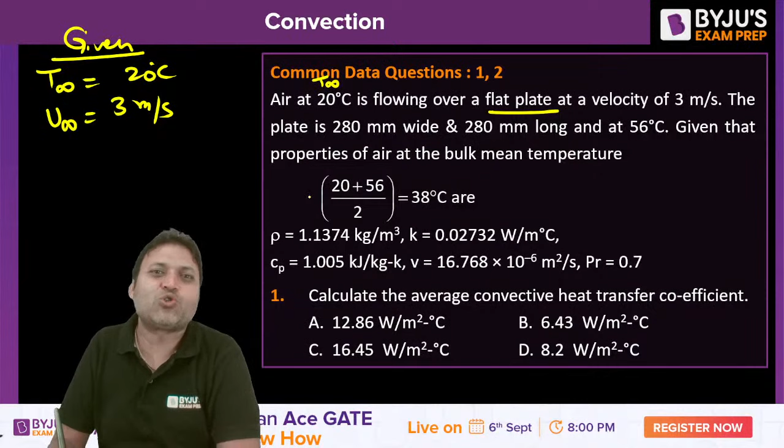Air at 20 degrees Celsius, which we call the free stream temperature of air, is flowing over a flat plate at a velocity, which we call U infinity, equal to 3 meters per second. The plate is 280 mm wide, and length L is equal to 280 mm or 0.28 m. The surface temperature is 56 degrees Celsius. The properties of air are given at the bulk mean temperature, which we can also call the film temperature, and are to be used at that film temperature.

These are the properties of air: density, thermal conductivity, specific heat, and kinematic viscosity, as well as Prandtl number, are given. The first part of the question asks to calculate the average convective heat transfer coefficient. You need to find out H bar. Can you solve it?

First step is to check whether the flow over the flat plate is laminar or turbulent, because there is a different formula for H if the flow is laminar, and a different formula for calculation of H if the flow is turbulent. So first, let us find out the Reynolds number based on the length of the plate, that is rho into U infinity into L by mu, or we can say U infinity L by kinematic viscosity.

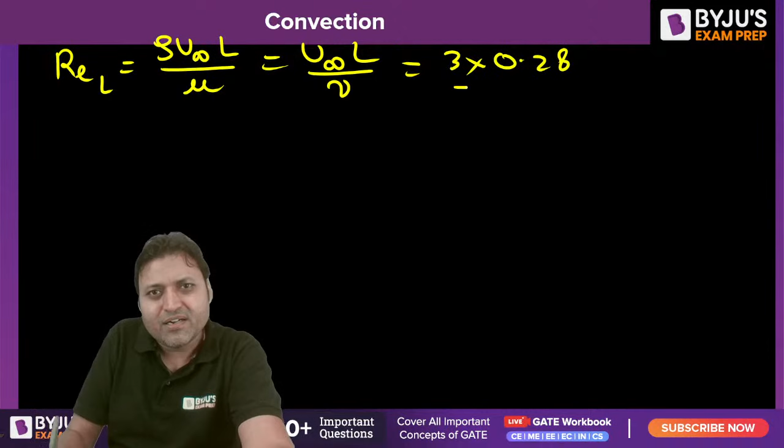Can you find out the Reynolds number? What is U infinity? That is 3 meters per second. Length is 0.28 and kinematic viscosity is given as 16.768 into 10 to the power minus 6. What is the value of Reynolds number? Can you let me know?

The value of Reynolds number should come out to be... are you getting 5 into 10 to the power 4 or not? Reynolds number based on the plate length, using kinematic viscosity, because meter square per second is the unit, it is the kinematic viscosity. 5 into 10 to the power 4.

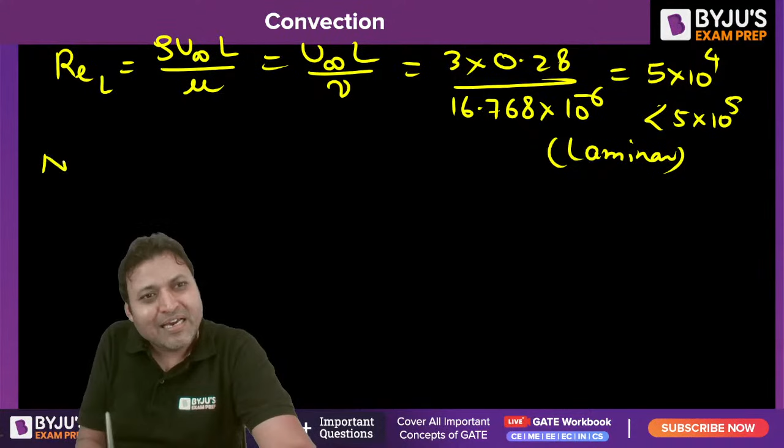So it is almost 5 into 10 to the power 4, which is less than 5 into 10 to the power 5. So the flow is laminar, and if the flow is laminar, average Nusselt number is given by H bar.

H bar into L by Kf is equal to 0.664 into Reynolds number to the power 1 by 2 into Prandtl number to the power 1 by 3. From here we can find out H bar. What is that? 0.664 into 5 into 10 to the power 4 to the power 1 by 2 into Prandtl number, value 0.7, to the power 1 by 3, into thermal conductivity of the fluid, that is 0.02732 upon L, that is 0.28.

Can you find out H bar? What is the value of H bar? Is this clear?

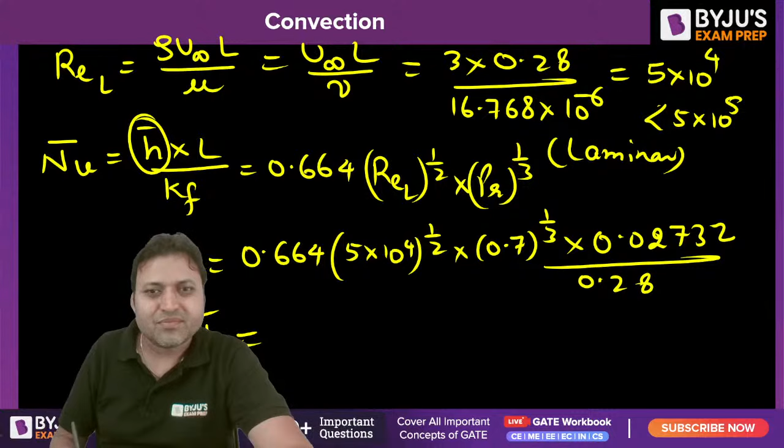If the flow would have been turbulent, can you find out the value of H bar? For turbulent flow, what would have been the formula? When Reynolds number would have been greater than 5 into 10 to the power 5, then Nusselt number would have been H into L by Kf equals 0.03 into Reynolds number to the power 4 by 5 into Prandtl number to the power 1 by 3. That would have been the formula.

If you solve this, then your answer should match with an option. Can you solve it? Can you get the value? Are you guys getting option A or not?

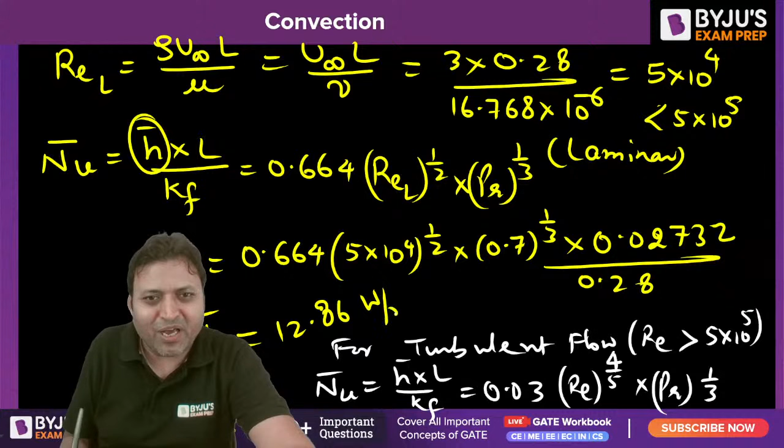12.86. Please give me thumbs up those who are getting 12.86. Option A, very good, Kranti. Well done. Have you understood the question? Have you understood the solution? 12.86 Watt per meter square Kelvin is the correct answer, option A.

That is the first part. The second part is: what is the rate of heat transfer by convection? How to calculate the heat transfer rate by convection using Newton's law, H bar into surface area into delta T. What is H bar? We have already calculated, 12.86. What is the area? That is L into B into delta T. Delta T would have been, what is delta T?

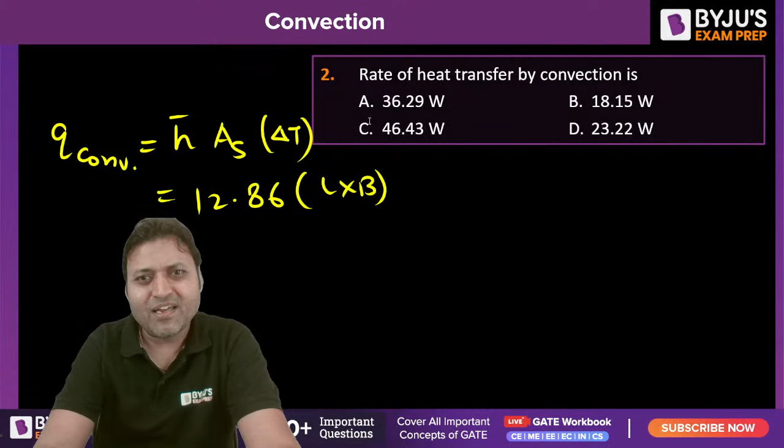Delta T would have been 56 minus 20, Ts minus T infinity. Put the value: 12.86 into 0.28 into 0.28 into Ts, that is 56 minus 20. What is the value of heat transfer?

Yes, Narayanan, are you asking something? Bulk mean temperature is the film temperature where the properties are supposed to be used. Are you getting option A, 36.29?

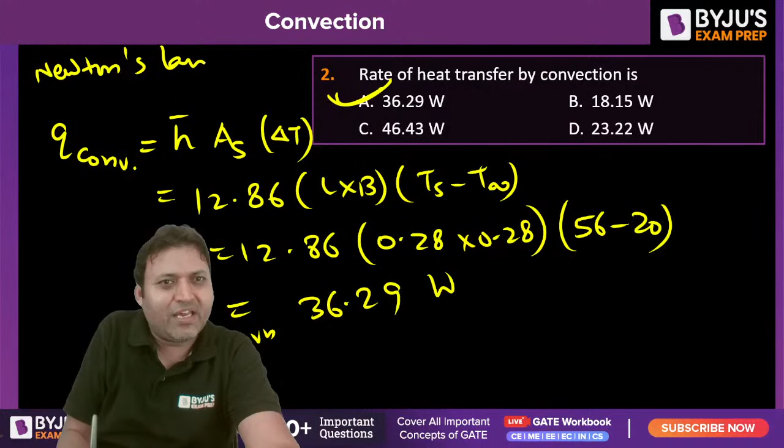Newton's law of cooling or convection, Newton's law of cooling is... Quickly solve the question, quickly get the answer. Your speed and accuracy, these are the two things which are important. Alright, can we proceed for the next one?

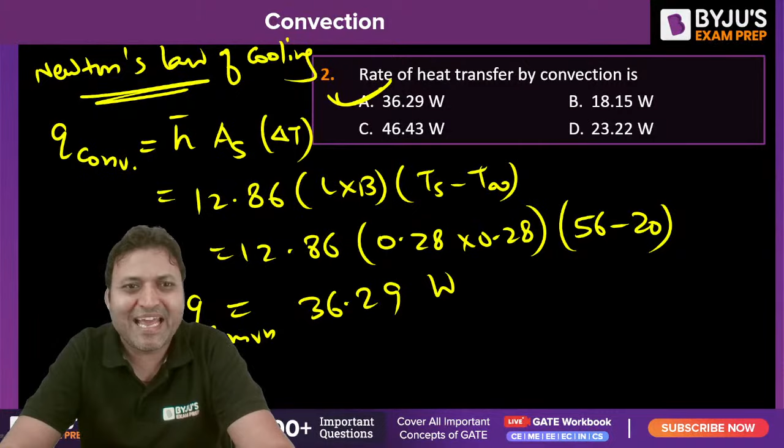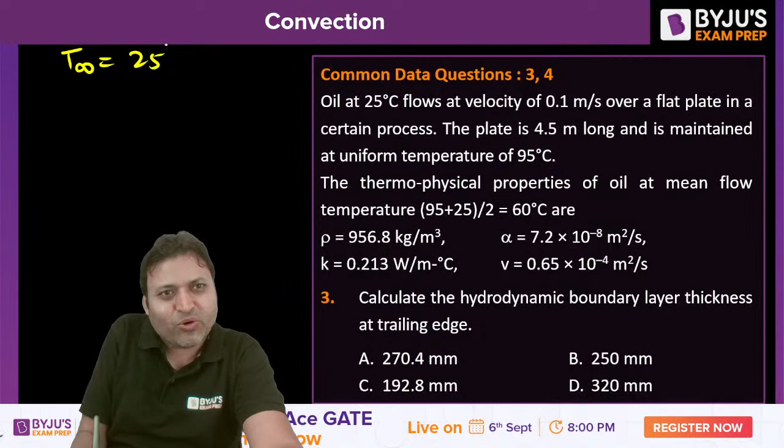Common data question for 3 and 4. Oil at 25 degrees Celsius, it means the free stream temperature of oil is 25 degrees Celsius. That is given. First of all, always write the given parameters. Flows at a velocity, that is U infinity free stream velocity, 0.1 meter per second, over a flat plate in a certain process. The plate is 4.5 meter long and is maintained at a uniform temperature, plate temperature TS, 95 degrees Celsius. The thermophysical properties of oil at mean flow temperature, that is 60 degrees Celsius, is called film temperature.

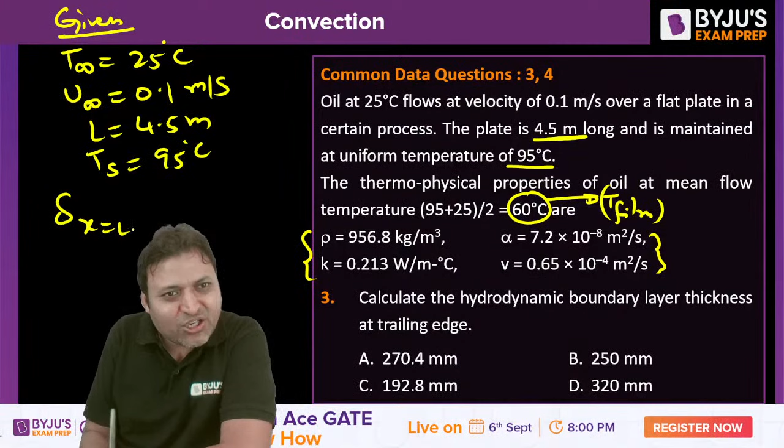You can call mean temperature as 95 plus 25 by 2, equals 60 degrees Celsius. These are the properties which are supposed to be used at 60 degrees Celsius. Calculate the hydrodynamic boundary layer thickness at the trailing edge, delta at x equals L, is the first part. We need to find out delta at x equals L. Can you solve it? First, again we need to check whether the flow is laminar or turbulent. How to check? Reynolds number at x equals L, that is U infinity L by kinematic viscosity. Put the values.

U infinity is 0.1, L is 4.5, and kinematic viscosity is 0.65 into 10 to the power minus 4. If you solve for Reynolds number, what is the answer? The Reynolds number will come out to be, please check and let me know. Are you getting 6923?

Which is again less than 5 into 10 to the power 5, that is for external flow, flow over a flat plate. For the external flow Reynolds number, because it is less than 5 into 10 to the power 5, then it is laminar. If it is laminar, delta x is given by 5x upon under root of Rex.

For at x is equal to L, you can find out delta at x is equal to L is equal to 5 into L, that is 4.5 upon under root of 6923 meter. What is the value of delta at x is equal to L? What is the correct answer?

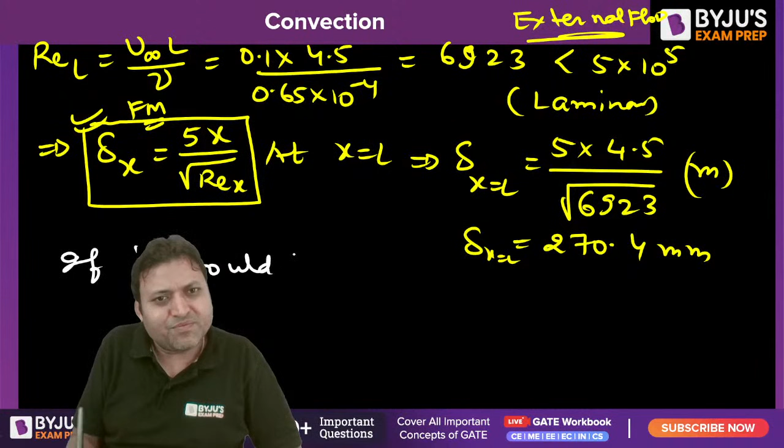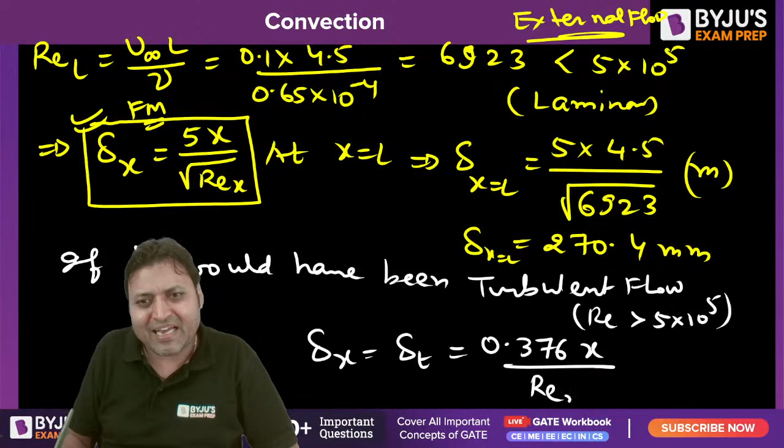If the flow would have been turbulent, if it would have been turbulent flow, how? When Reynolds number would have been greater than 5 into 10 to the power 5. Then delta x, that is delta t, would have been 0.376x upon Rex to the power 1 by 5. That would have been the expression for delta x. But because it is laminar flow, that is why this expression is supposed to be used.

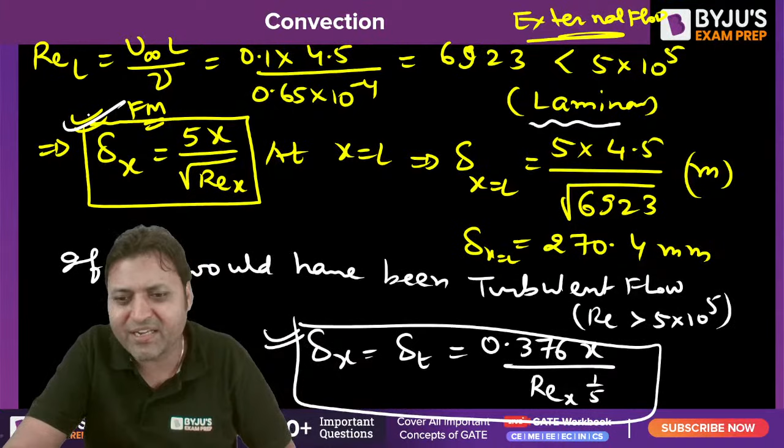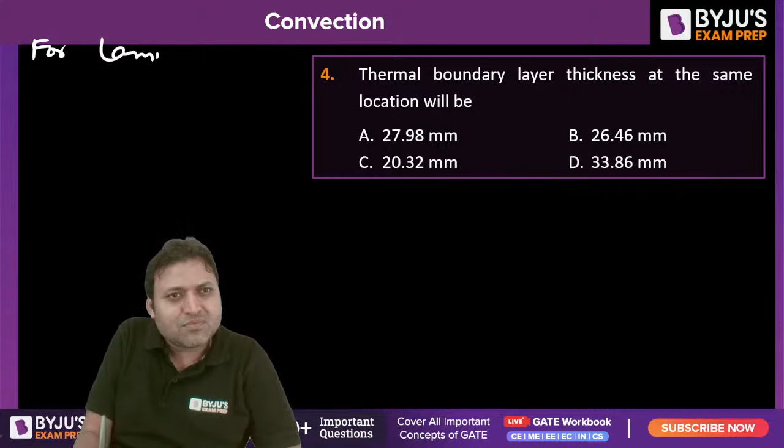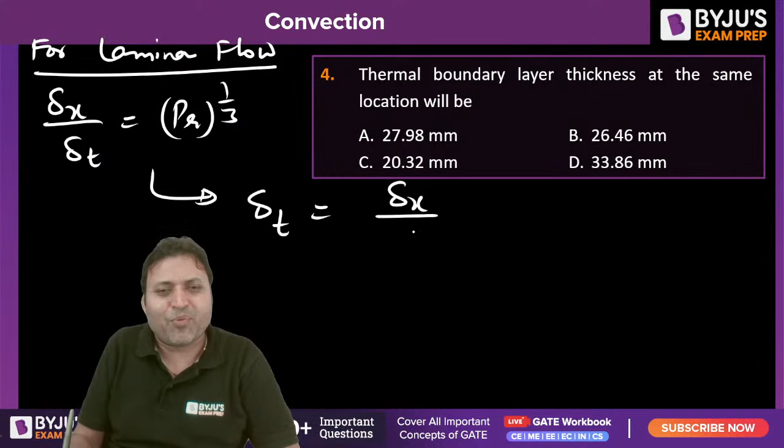What is the thermal boundary layer thickness at the same location? The next part is thermal boundary layer thickness for laminar flow. For laminar flow, delta x by delta t is equal to Prandtl number to the power 1 by 3, isn't it? So delta t, thermal boundary layer thickness, is delta x upon, or delta L upon, we need to find out at x is equal to L, Prandtl number to the power 1 by 3.

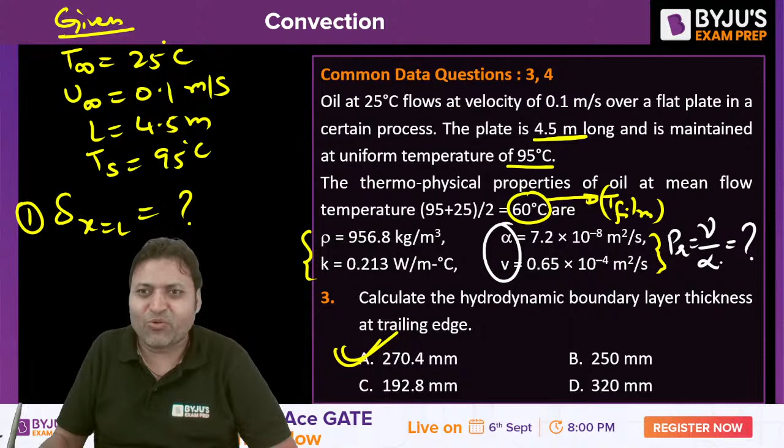What is the value of Prandtl number? Prandtl number is not given in the question. But we can find out the Prandtl number from this. What is the Prandtl number? Prandtl number is equal to kinematic viscosity upon alpha, isn't it? We could have calculated Prandtl number, kinematic viscosity upon alpha.

It would have been 270.4 upon Prandtl number, which is kinematic viscosity upon alpha. So 0.65 into 10 to the power minus 4 divided by alpha, that is 7.2 into 10 to the power minus 8, to the power 1 by 3. That will give you delta t. Can you find it out and let me know the answer?

Can you solve it? If the flow would have been turbulent, then delta x would have been same as delta t. If the flow would have been turbulent, delta x and delta t would have been same. But if the flow is laminar, then delta x and delta t are related with the Prandtl number. Right?

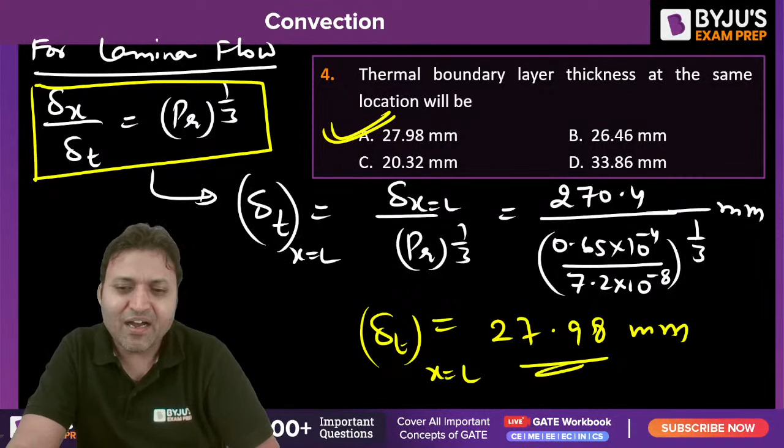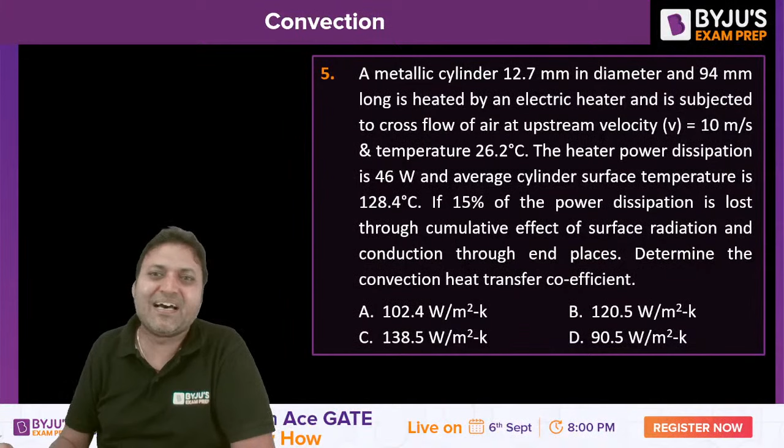A metallic cylinder, there is a metallic cylinder, 12.7 mm in diameter. Diameter is given as 12.7 mm and 94 mm long. Length is given as 94 millimeter. Is heated by an electric heater and is subjected to cross flow of air. There is an air flow.

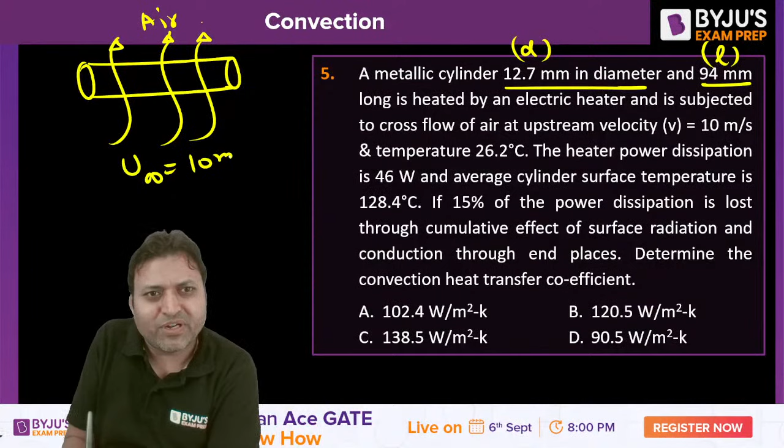Cross flow of air at upstream velocity V, or U infinity, is equal to 10 meter per second, and temperature T infinity of air, free stream temperature - it is external flow because the fluid is flowing over the surface. Temperature is 26.2 degrees Celsius.

The heater power dissipated is 46 watt. Q heater is equal to 46 watt. And the average cylinder surface temperature Ts is equal to 128.4 degrees Celsius.

If 15% of the power dissipation is lost through the cumulative effect of surface radiation and conduction through the end plates, the remaining is through convection. Determine the convection heat transfer coefficient H.

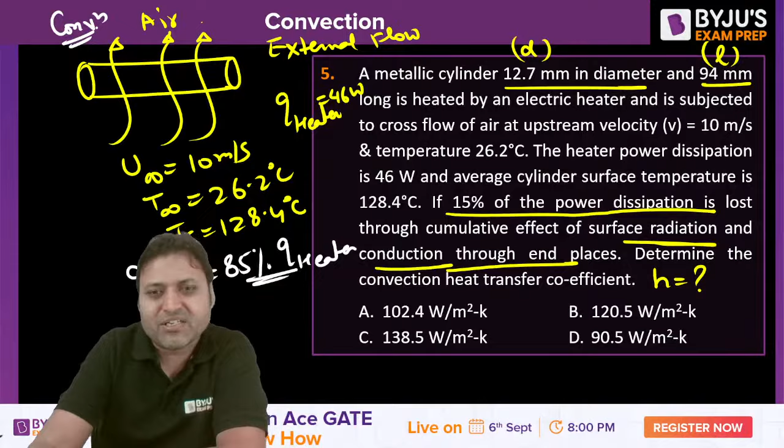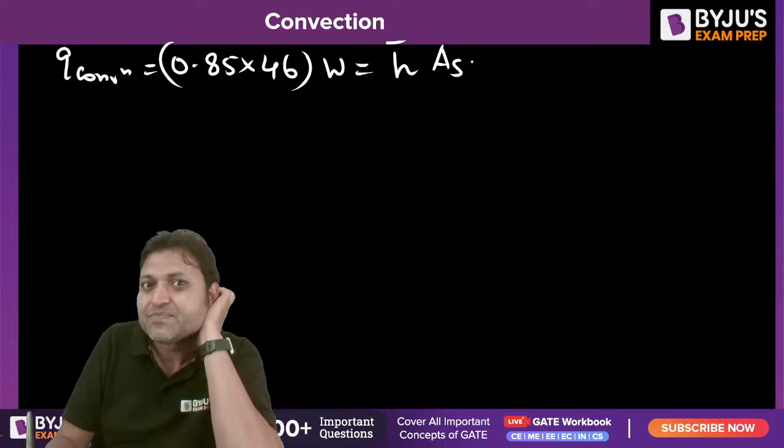So Q convection is equal to 85% of Q heater, since 85% of the power is lost due to convection. Q convection equals 0.85 into 46 watt, equals H into area into delta T, that is Ts minus T infinity. So H bar equals 0.85 into 46 upon pi d L.

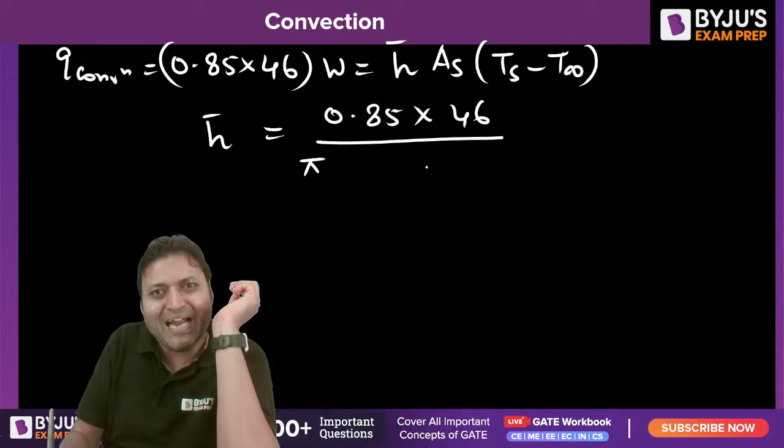Area will be equal to pi d L. Pi into diameter is 12.7 into 10 to the power minus 3, into L is 94 into 10 to the power minus 3, is the area, into Ts minus T infinity. Ts is 128.4 minus T infinity is 26.2. Do the calculation, you will get the answer.

Do the calculation and you will get the answer. Can you find it out? Watt per meter square Kelvin. What is the answer for question number 5?

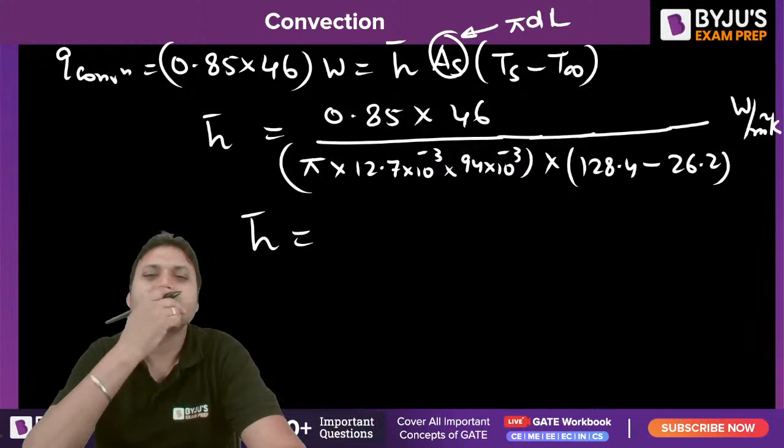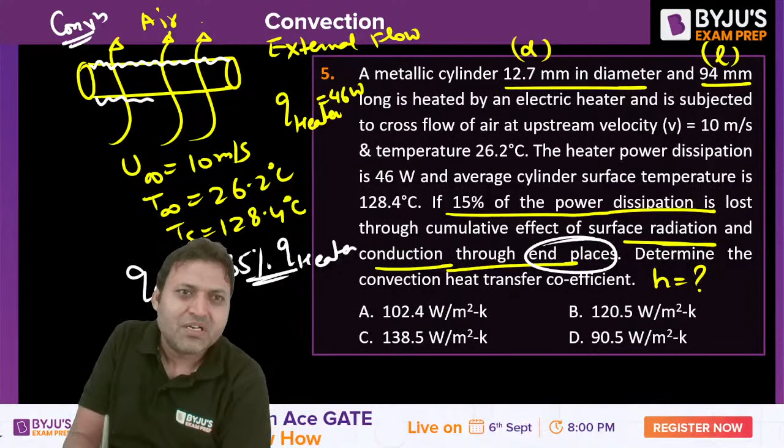Why is it pi d L? Because from the end plates, the mode of heat is lost through cumulative effect of radiation and conduction. So it is only this surface which is available for convection. The convection is taking place from the periphery of the cylinder, that is why the area will be taken as pi d L.

Are you getting option A or not? 102.4 watt per meter square Kelvin, please do let me know. Option A, very nice - Rashad, Madhu Amsi. Good, what about others?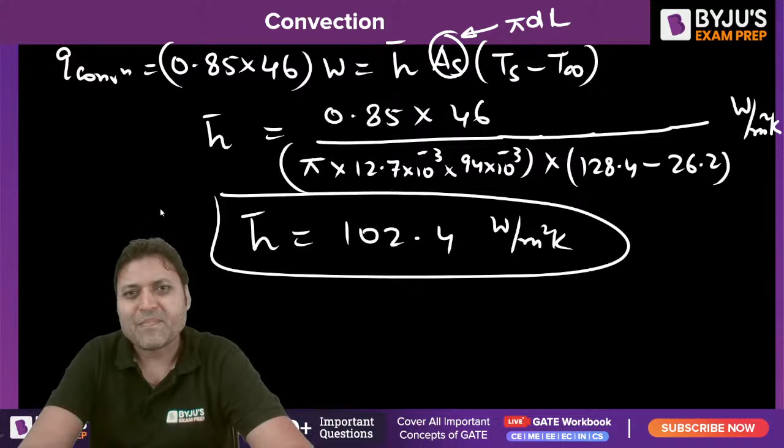Next, again common data question 6 and 7. Very beautiful question.

A system of heating water from an inlet temperature of 20 degrees Celsius, that is TMI, to an outlet temperature of 60 degrees Celsius. It means there is heating of water taking place. Water is flowing and it is getting heated from 20 degrees Celsius to 60 degrees Celsius.

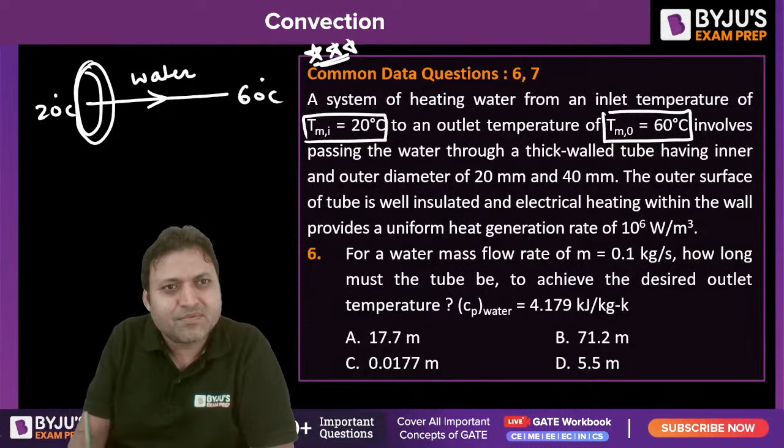This involves passing the water through a thick walled tube - a cylindrical tube, having inner and outer diameter of 20 mm and 40 mm. D1 inner diameter is 20 mm and D2 is 40 mm. That is TB1, bulk temperature of the fluid - this is TB2, or TMI and TMO.

The outer surface of the tube is well insulated, like this. And electrical heating within the wall provides a uniform heat generation. The wall is getting heated due to an electrical heater, like this.

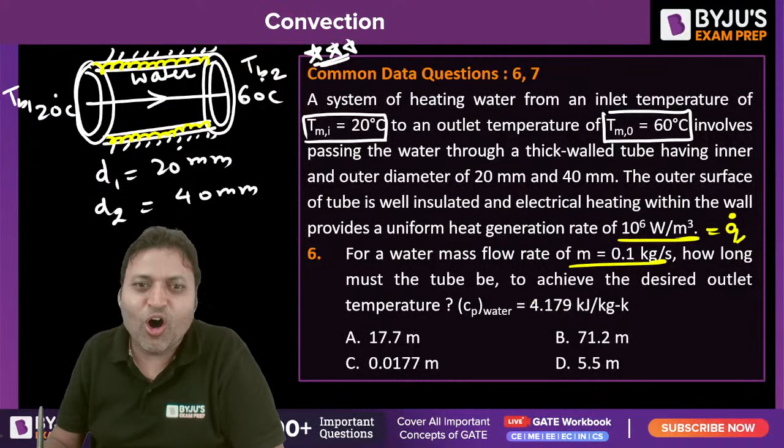That will produce a uniform heat generation of 10 to the power 6, that is Q dot, Q dot is 10 to the power 6 watt per meter cube. For a water mass flow rate of 0.1 kg per second, how long must the tube be to achieve the desired outlet temperature? What should be the length of the tube?

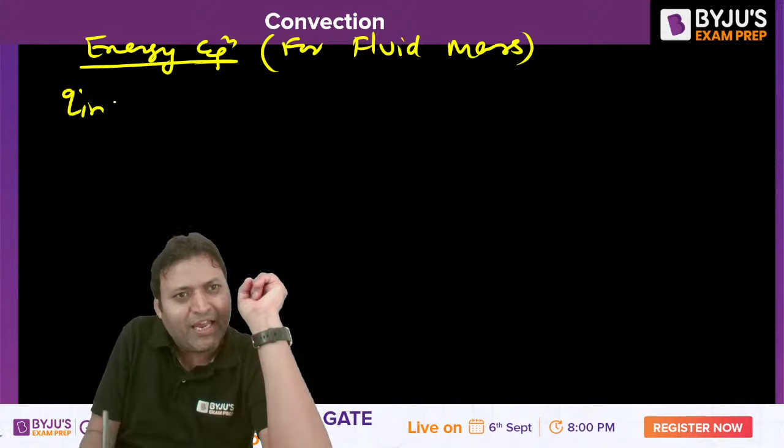If we apply the energy conservation equation for the fluid mass from inlet to outlet, then we can say Q in plus Q generation is equal to Q out plus Q stored.

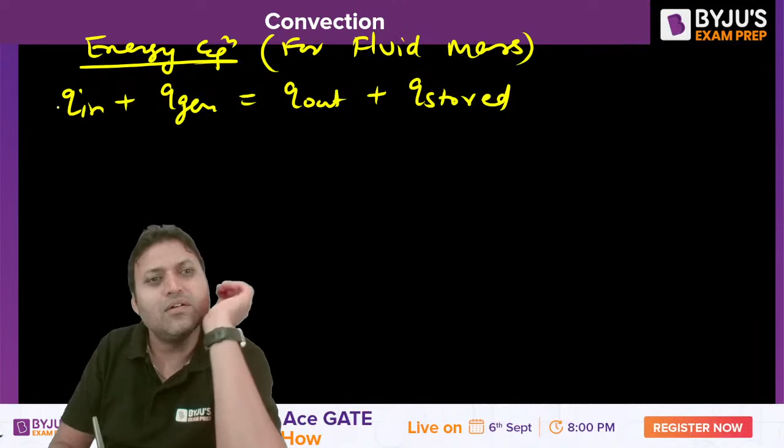So there is no heat entering or no heat leaving. Whatever heat is generated in the system will be equal to heat stored.

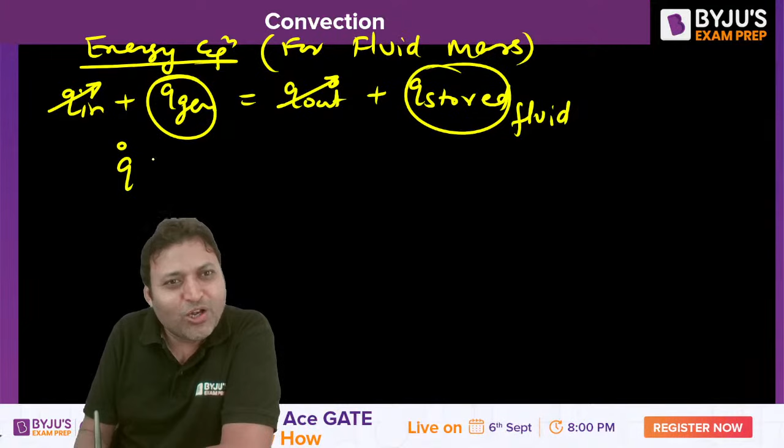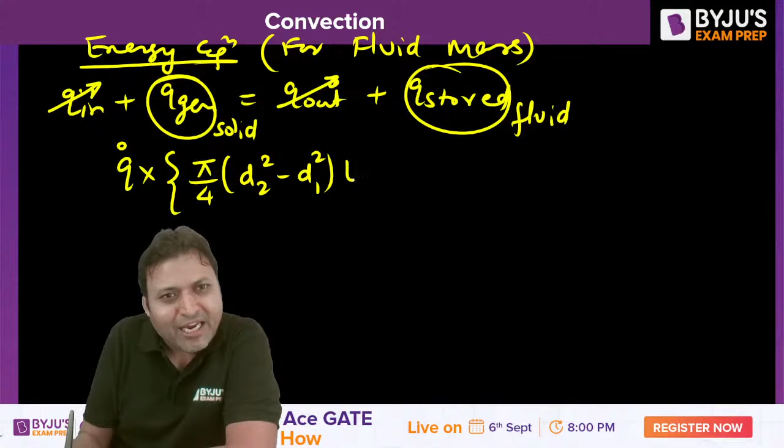Q generation is taking place in the solid. Whatever energy is generated in the solid due to the electrical heater will be equal to the energy stored in the fluid. So Q dot into volume of the solid, volume of the tube, pi by 4 times d2 square minus d1 square into L, that will be the volume, is equal to mass flow rate of the fluid into Cp into Tmo minus Tmi. This will be the energy conservation equation.

The energy is getting stored now. Energy getting stored, Tmo minus Tmi.

Put the values from the given question. 10 to the power 6 into pi by 4 into, d2 is 40 mm. It will be 0.04 square minus 0.02 square. The question is to find out L. Can you solve it? Into L. L is the unknown. Mass flow rate is given as 0.1, specific heat is given as 4.179, into outlet temperature is 60 minus inlet temperature is 20.

The only unknown is L. What should be the length?

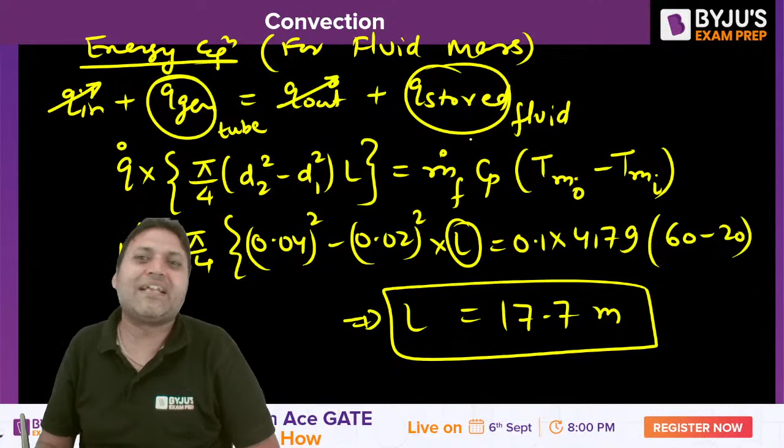What is the answer? Are you getting 17.7 meter or not? That should be the length. Have you understood the energy conservation equation? Whatever total energy is generated in the tube due to the electrical heater is equal to the energy stored in the fluid. 17.7 meter, option A is the correct answer.

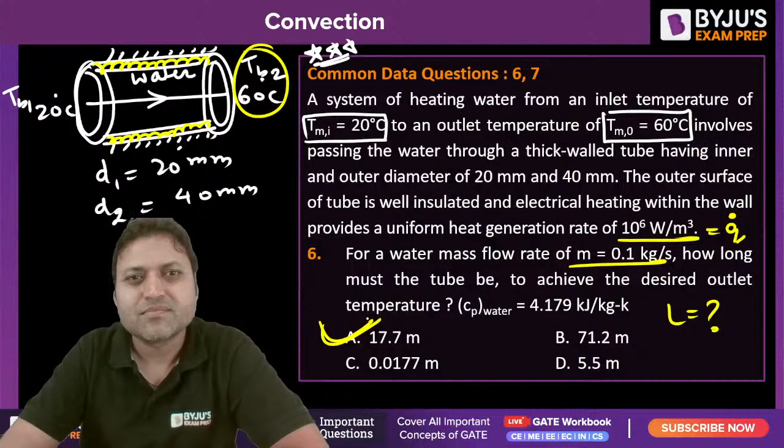The next part: if the inner surface temperature of the tube is 70 degrees Celsius at the outlet. If we talk about the outlet, this is how the tube cross section will look like. If the inner surface temperature, let us say TS2, is 70 degrees Celsius.

What is the local convection heat transfer coefficient at the outlet? H2 will be how much? Tmo is... it is getting heated now, Tmi is 20 degrees Celsius, Tmo is 60 degrees Celsius. So what can we say, what is the rate of heat transfer coefficient? What will be the heat transfer coefficient? Can you solve it?

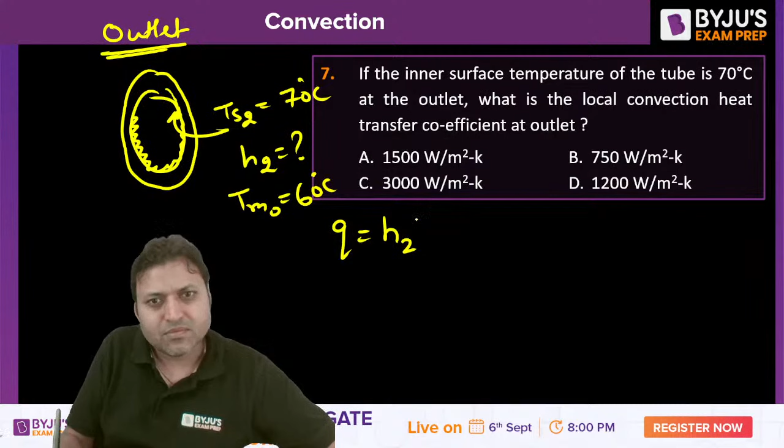You can say the rate of heat transfer is H2 into A2, area available for convection. This is A2 at the outlet, into TS2 minus Tmo, is equal to Q stored, is equal to Q generation, is equal to Q stored.

The total rate of heat transfer due to convection, this is for the fluid, Q convection equals this, and Q generation or Q stored you can easily find out. So H2 will be equal to Q stored, which is M dot into Cp into Tmo minus Tmi.

What is the area? Area will be pi into d1 into L, into TS2 minus Tmo, isn't it? That will give you H2.

Put the values. Mass flow rate is given as 0.1 kg per second. Specific heat is given as 4179 joule per kg Kelvin. Tmo is 60 degrees Celsius, Tmi is 20 degrees Celsius, d1 is 20 mm, L we have already calculated as 17.7 meter, and TS2 is given as 70 degrees Celsius.

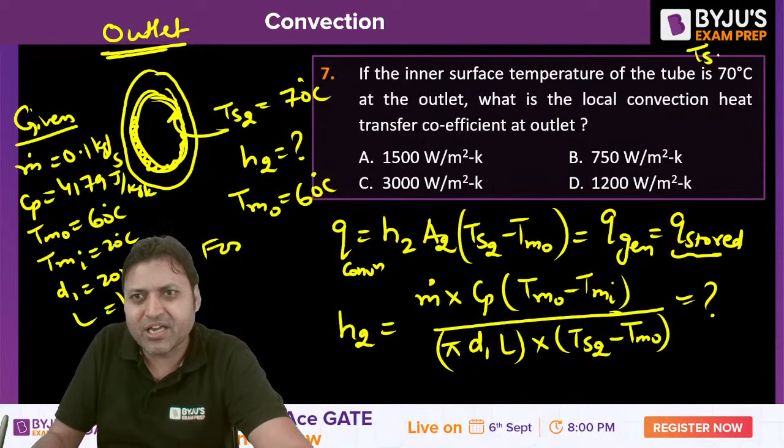Can you solve it and let me know the answer? Are you getting option A or not?

For the convective heat transfer coefficient, are you getting option A, 1500 watt per meter square Kelvin, or not? Option A is the correct answer.

The next question, question number 8 and 9, again common data questions. Experimental tests on a portion of a turbine blade having chord length 40 mm indicate a heat flux to the blade of 95 kilowatt per meter square, when the blade operates in an airflow at T infinity of 1150 and velocity of 160 meter per second, to maintain a steady state surface temperature of 800, TS1. If TS1 is 800, T infinity is 1150, there is heat flow, the heat flux is 95 kilowatt per meter square.

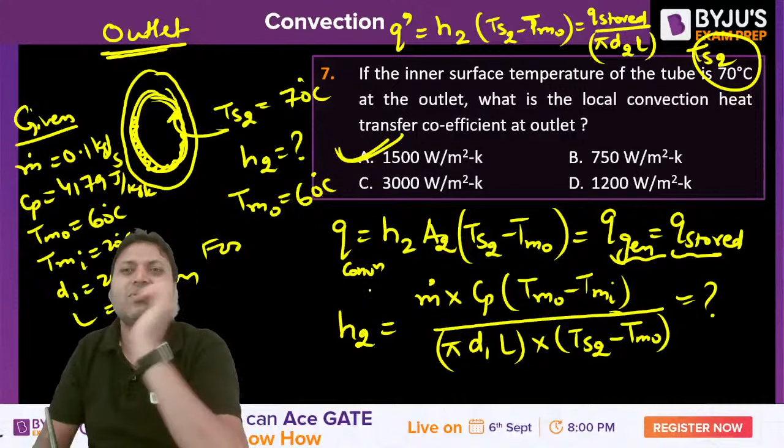That would have been pi into d, that would have been pi into d1 into L.

So that is how you could have calculated H2. That is Q dash. Q dash would be equal to H2 into TS2 minus TMO. This is how it should have been.

We are applying Newton's law of cooling for the heat flux. What we are saying is Q convection is equal to Q stored. The total heat transfer rate in the element is equal to Q stored or Q generation. Whatever energy is generated is getting convected. That is the total.

Even when the temperature is variable, we are finding out Q dash from here per unit area. And this Q dash will be equated for the outlet because surface temperature is also changing now, from inlet to outlet. So the surface temperature at outlet is given, and we need to find H, which will also change from inlet to outlet. Surface temperature is changing from inlet to outlet, and the fluid temperature is also changing from inlet to outlet. That is why we are applying the convection at outlet only.

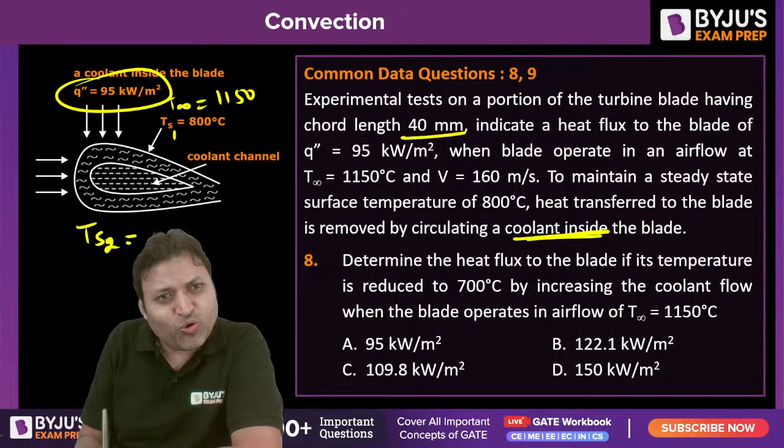Then TS2 becomes, this is Q1. So the given parameters are: Q1 is 95 kilowatt per meter square, T infinity is 1150 degrees Celsius, TS1 is 800, and V1 is equal to 160. These are the parameters given.

Now we need to find out if TS2 becomes 700 degrees Celsius, what is Q dash? What is the heat flux if the temperature is reduced to 700 by increasing the coolant flow, when the blade operates in the airflow of T infinity, which is still the same? Now what is Q2 dash?

That is equal to H2. Now if we want to write Q2 dash, that is equal to H2 into T infinity minus TS2, isn't it? Do you agree or not? Now we need to find out H2.

As we know, Nusselt number is given by H into L by K. It is a function of Reynolds number and Prandtl number, for laminar and turbulent flow. Now Reynolds number is not a function of TS, and Prandtl number is not a function of TS. Even if TS changes, then Nusselt number, which is H into L by Kf, remains constant.

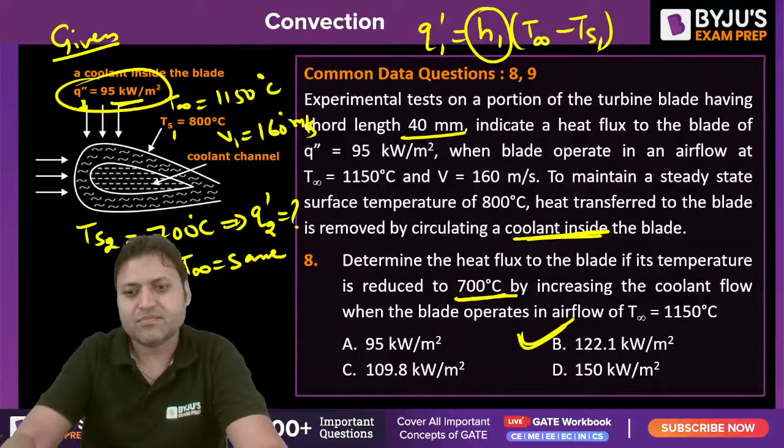Have you understood? H2 is equal to H1. Why? Because neither Reynolds number nor Prandtl number is a function of surface temperature. That is why even if TS changes, Nusselt number will have no impact. And if Nusselt number has no impact, H has no impact. So Q2 dash will be equal to H1 into T infinity minus TS2.

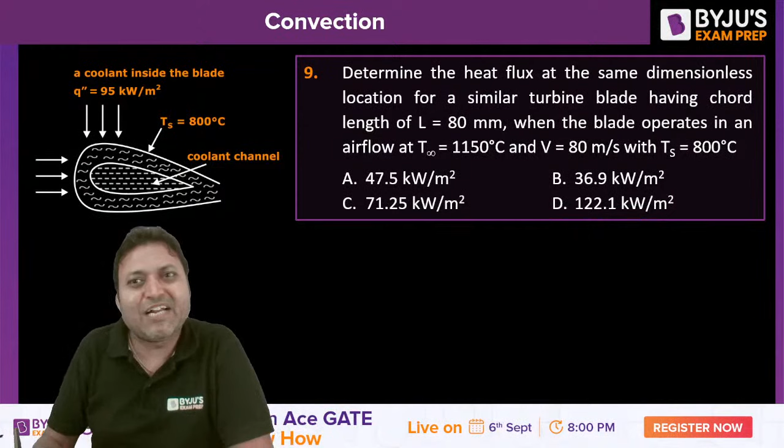Now the second part: determine the heat flux at the same dimensionless location. What is the meaning of dimensionless location? It means same Reynolds number, since Reynolds number involves the dimension. The Reynolds number is the same.

For the similar turbine blade having a chord length of 80 mm. Earlier what was the chord length? Earlier the chord length L1 was 40 mm. Now L2 becomes 80 mm. When the blade operates in the airflow at the same temperature T infinity, velocity V2 becomes 80 meter per second. Earlier what was the velocity? V1 was 160 meter per second. With TS 800 — earlier also the temperature was 800. This TS1 was 800, and TS2 is also 800.

And T infinity is also same. Then what do we need to find out? We need to find out the heat flux Q2 double dash, Q2 dash. Q2 dash is equal to H2 into T infinity minus TS2, and TS2 is equal to TS1.

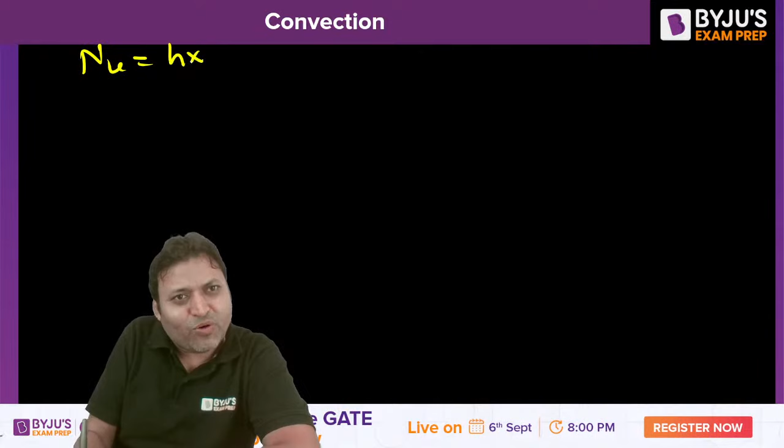And how to calculate H2? Now, because the dimensionless location is same, here L2 is changing, here velocity is changing. L and V, they change. Because the Reynolds number is same, Nusselt number equals H into L by Kf, a function of Reynolds number and Prandtl number. So Reynolds number remains constant and the Prandtl number also remains constant, giving a constant value. So H is inversely proportional to L. So H2 is equal to H2 by H1 equals L1 by L2, meaning H2 equals H1 into L1 by L2.

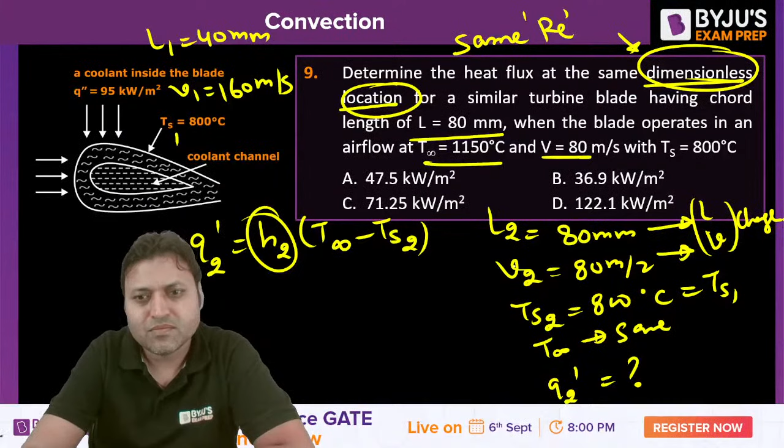Can you put the value? Q2 dash equals H2, that is H1 into L1 by L2 into T infinity minus TS2. What is H1? You can put the value of H1. H1 is equal to Q1 dash upon T infinity minus TS1, into L1 by L2. What is L1? L1 was 40, L2 is 80, so 40 by 80 into T infinity minus TS2. Now these two get cancelled out because TS1 equals TS2 and T infinity is same. It gives 95 into 1 by 2 kilowatt per meter square, that is 47.5 kilowatt per meter square.

Option A is the correct answer. Option A. Yes, Rashad. Option A. Nagaswamy, Option A. Is this clear to everyone? Is it clear?

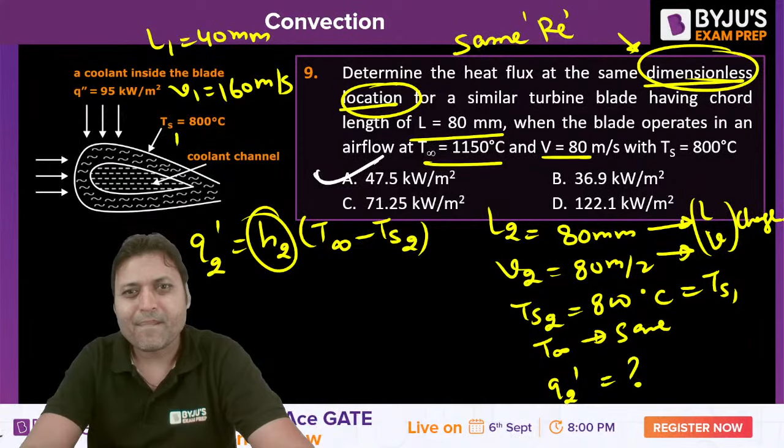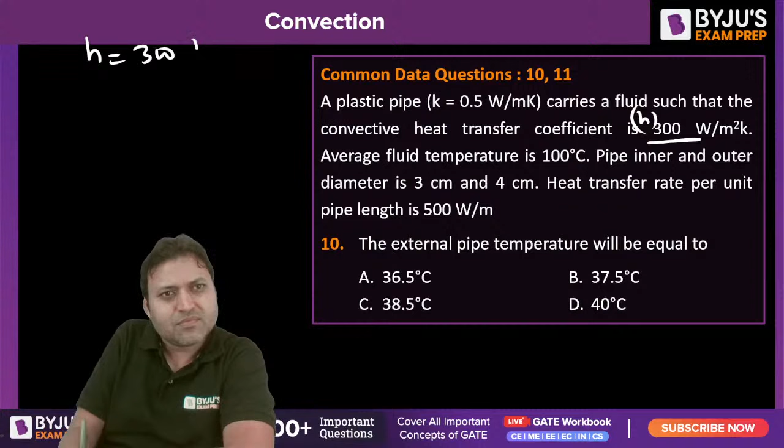Next question, question number 10 and 11. A plastic pipe thermal conductivity is given, carries fluid such that the convective heat transfer coefficient is 300 watt per meter square Kelvin, H is given. Average fluid temperature is 100 degrees Celsius, Tf equals 100 degrees Celsius. Pipe inner and outer diameters are D1 is 3 centimeter, D2 is 4 centimeter. Heat transfer per unit pipe length Q by L is given as 500 watt per meter.

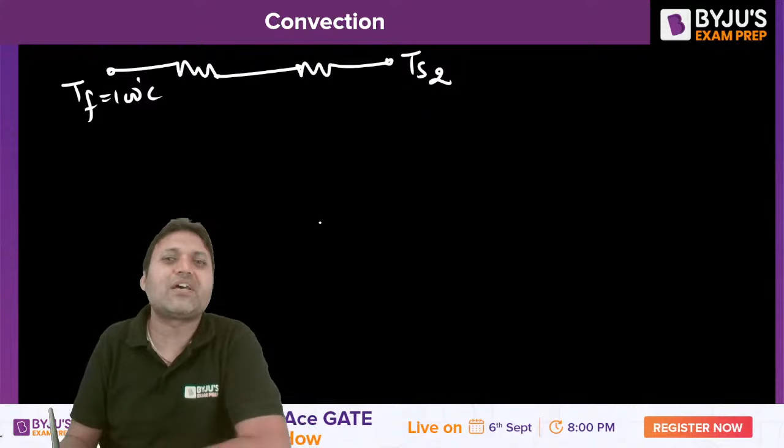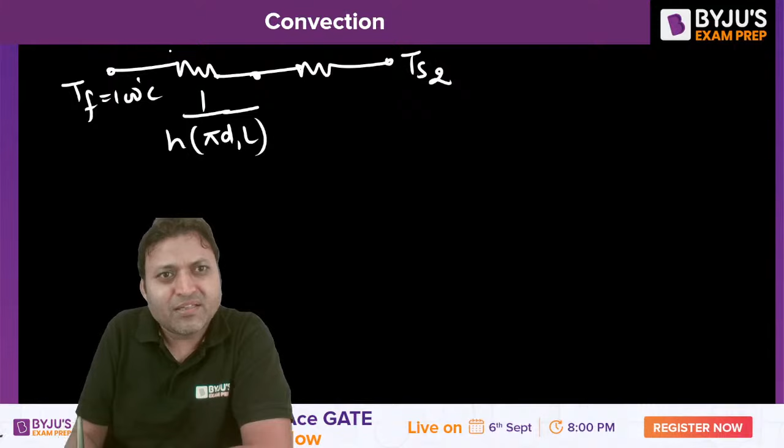The external pipe temperature will be equal to, that means Ts. What is the temperature Ts2? If we draw the circuit diagram, there is a fluid, this is Ts2. We can say there will be two resistances. This is T infinity or Tf, fluid temperature, equal to 100 degrees Celsius. This is Ts2, outer surface temperature of the pipe. First there will be convection, 1 upon H into pi into D1 into L, this is R convection, and there will be R conduction. Need to find out Ts2. R conduction will be equal to ln of d2 by d1 upon 2 pi kL. These are the data.

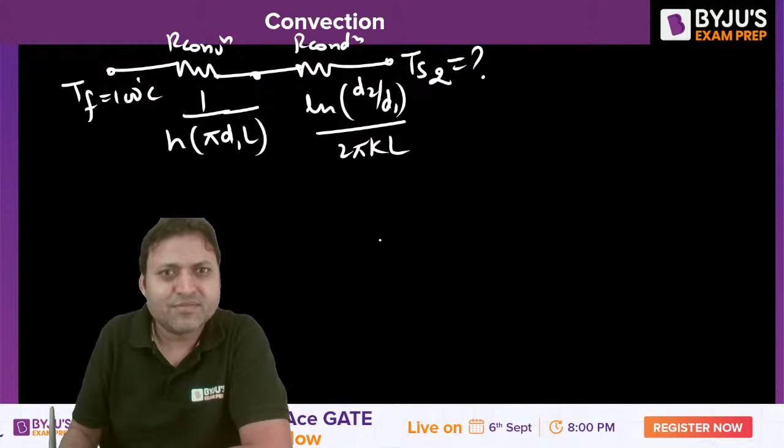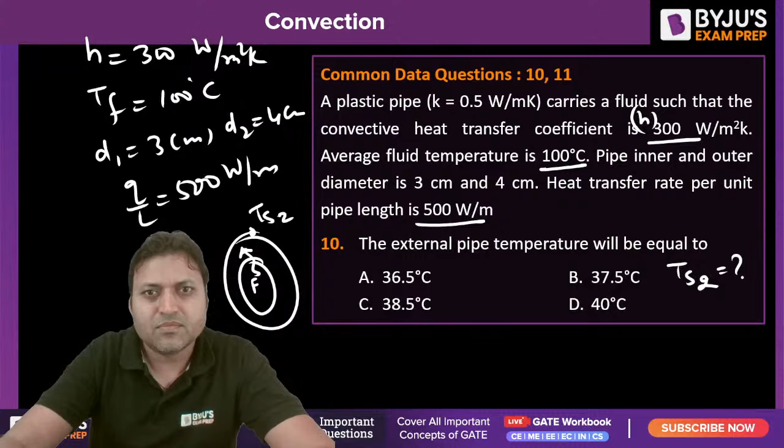We can easily find out Ts2 if Q by L is given. Q by L is given as 500 watt per meter. We can say Q equals delta T overall upon R equivalent. Delta T overall is Tf minus Ts2 upon R equivalent, which will be R conduction plus R convection. D1, D2 are given. Can you do the calculation and let me know the answer?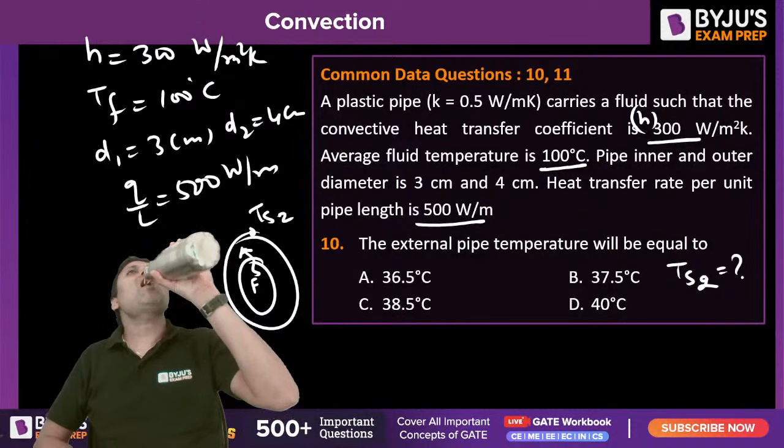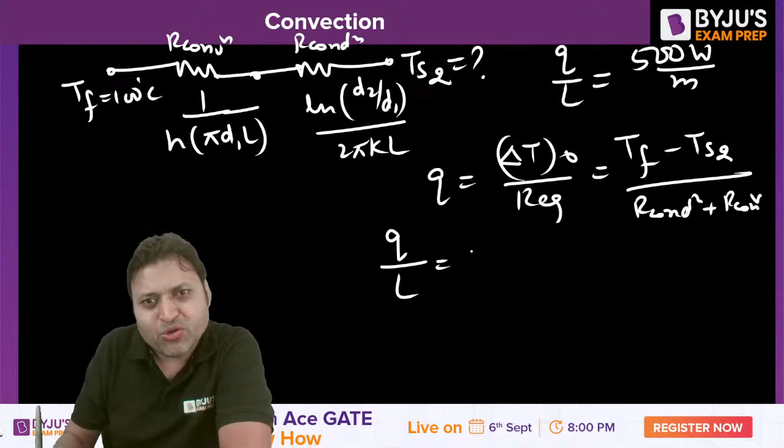It is a little bit complicated. So Q by L equals 100 minus Ts2 upon 1 upon H, given as 300, upon pi d1. Pi into d1, what is d1? That is 2mm, 2 centimeter, 3 centimeter, 0.03, plus ln of 4 by 3 upon 2 pi k. Thermal conductivity is given as 0.5. Put the value of Q by L here. So the only unknown is Ts2. What is the value of TS2? Can you solve it?

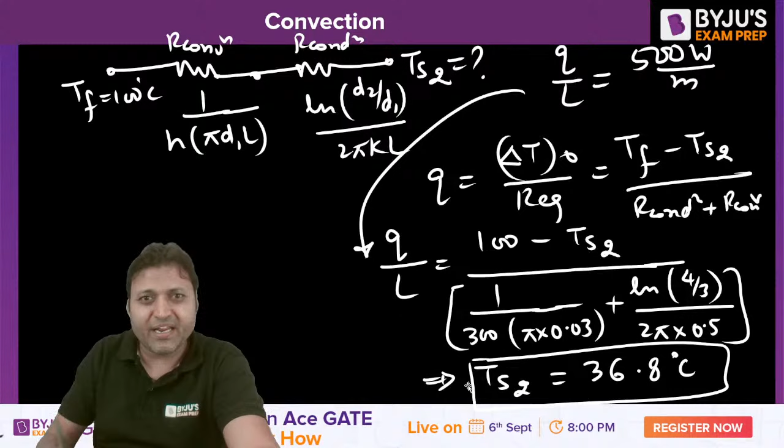Are you getting TS2 as 36.8 degrees? Please do let me know if you are getting TS2 as 36.8. Are you getting it or not? Option A, 36.5 or 36.8. I will share the PDF of this session to my Telegram group. 36.5 something. Yes, Rashid, good.

Question number 11 is overall heat transfer coefficient U on the outside area will be. So Q can be written as U naught into A naught into delta T overall, or Q by L. So Q equals U naught into pi into D2 into L into delta T overall, meaning T infinity or Tf minus TS2. From here, Q by L equals U naught into pi into...

What is the value? Q by L is given as 500 is equal to U naught pi into D2 is 0.04 into 100 minus 36.5. What is the overall heat transfer coefficient for question number 11? Are you getting U naught as 62.7 watt per meter square Kelvin? Option B. Are you getting option B or not?

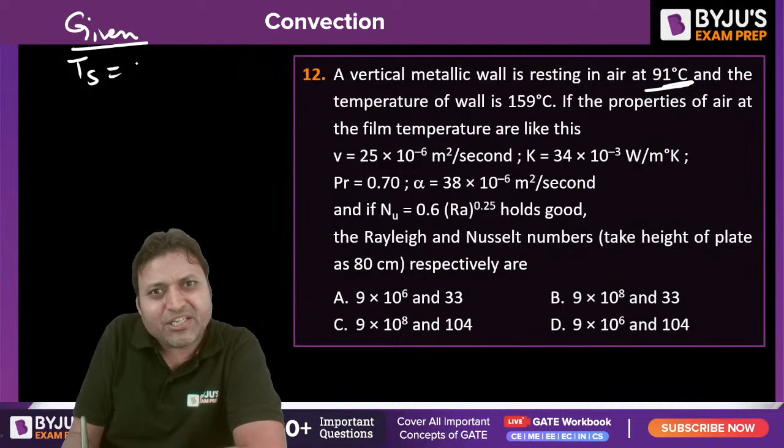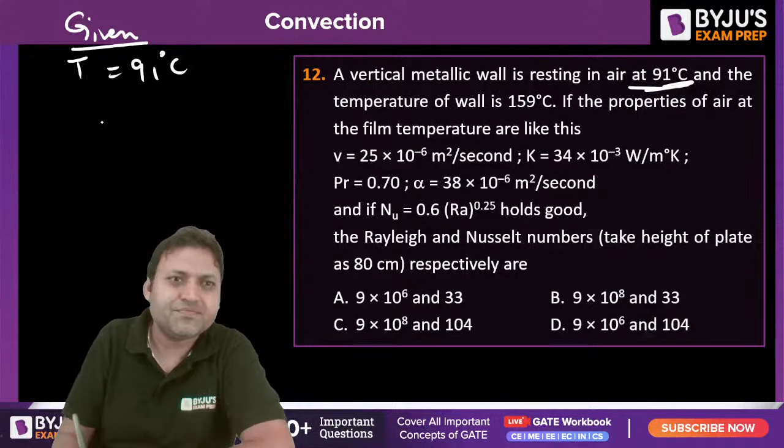One more question and then we will stop. The last question, from natural convection: a vertical metallic wall is resting in air at 91 degrees Celsius. Yes, 62.7 is the right answer. So this is the air temperature, 91 degrees Celsius, and the temperature of air is the free stream temperature, infinity. The wall temperature is 159 degrees Celsius. If the properties of air are at the film temperature, what is that film temperature?

Film temperature is Ts plus T infinity by 2. Kinematic viscosity is given, thermal conductivity of air is given, Prandtl number alpha, and Nusselt number is given as 0.6, Rayleigh number to the power 0.25. This is the expression for Nusselt number.

For the Rayleigh and Nusselt number, take the height or characteristic length as 80 centimeter or 0.8 meter. What will be the value of Rayleigh number and Nusselt number? How to find out the Rayleigh number? Once we find out the Rayleigh number, we can find out the Nusselt number.

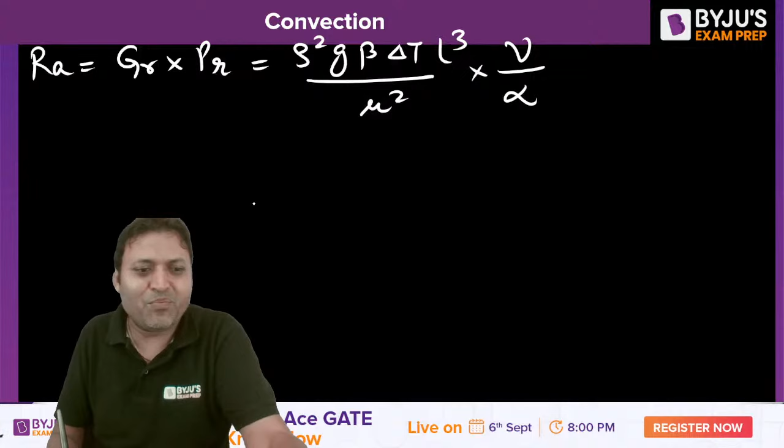Rayleigh number is equal to Grashof number into Prandtl number, and Grashof number is rho square g beta delta T L cube by mu square, into Prandtl number, or since Prandtl number is not given directly, we can write it as kinematic viscosity upon alpha, and rho square by mu square can be written as kinematic viscosity square. One kinematic viscosity gets cancelled out. Where beta is what? Beta is equal to 1 upon film temperature in Kelvin inverse.

That is beta for a perfect gas. For an ideal gas, beta is given as 1 upon film temperature. First of all, we should find out the film temperature. What is the film temperature? That is equal to 159 plus 91 by 2 degrees Celsius, that is 125. So film temperature is equal to 125 degrees Celsius, or in Kelvin, plus 273.

398 Kelvin. That is the film temperature. And beta is equal to 1 by film temperature. If you put the value, Rayleigh number is given by g is 9.81 into beta, that is 1 upon 398, into delta T. What is delta T? 159 minus 91, into L cube, 0.8 cube, upon kinematic viscosity.

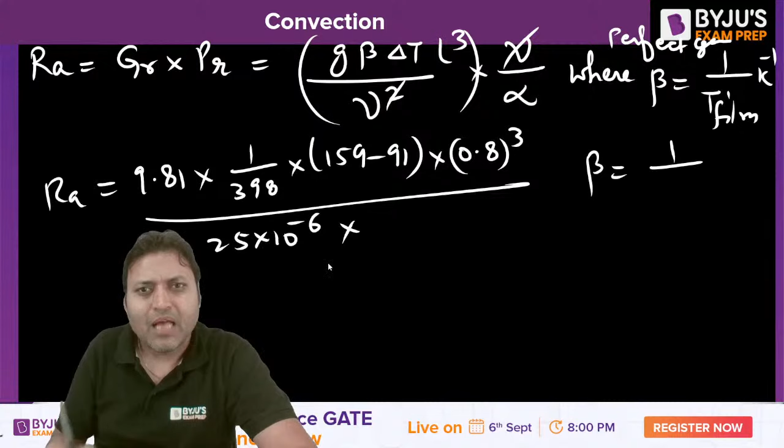We could have used the Prandtl number 25 into 10 to the power minus 6, into alpha. Alpha is given as 38 into 10 to the power minus 6. That will give you the Rayleigh number. Can you find out the Rayleigh number?

Are you getting Rayleigh number as 9 into 10 to the power 8 or not? Once you get the Rayleigh number, you can find out the Nusselt number, and Nusselt number is equal to 0.6 into Rayleigh number, 9 into 10 to the power 8, to the power 0.25. Nusselt number will come out to be around 103.9, that is 104. So it is 9 into 10 to the power 8 and 104. C is the right answer, yes, it's close to 104.

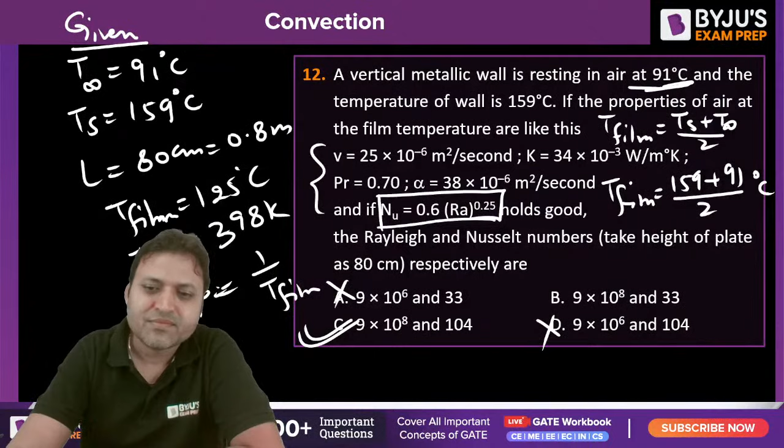So that completes our question practice for convection. This is your assignment question. There are 3 questions, 13th, 14th and 15th.

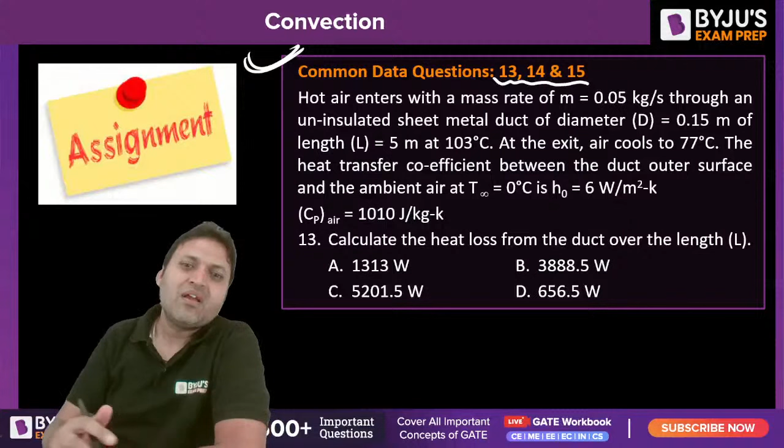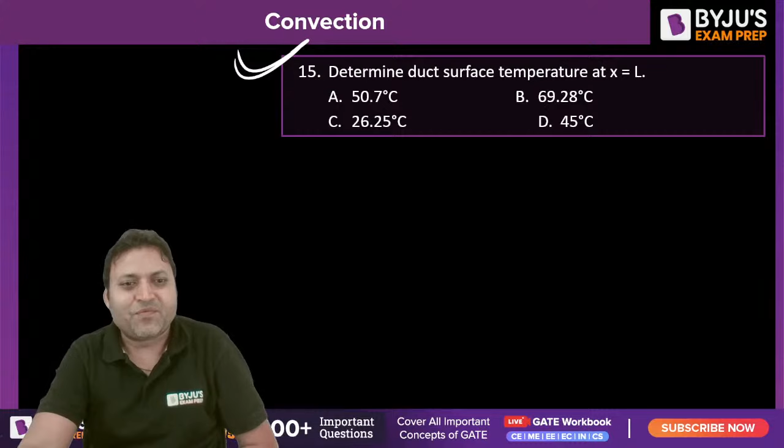And tomorrow we will meet for one more time at the same time, 10:45 p.m., and we will discuss the heat exchanger and radiation, the questions from the heat exchanger and the radiation mode of heat transfer.